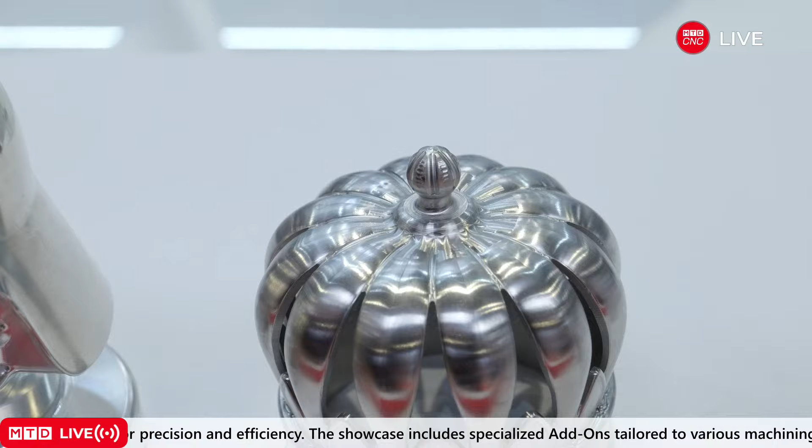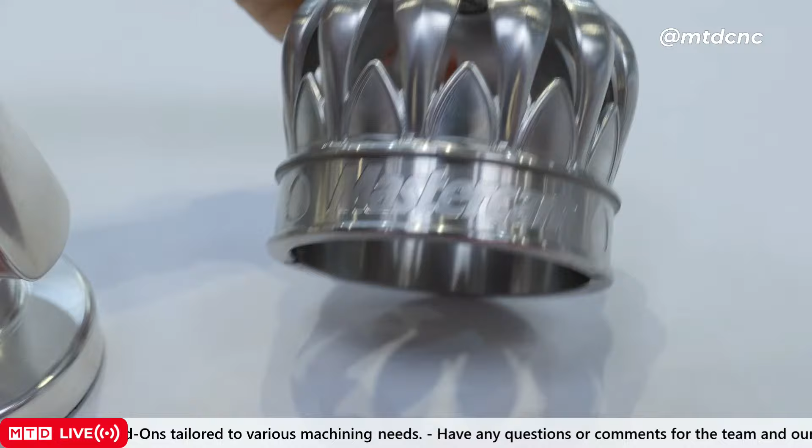Absolutely, it's wonderful that you've got the local UK manufacturing support here now, but you've got that global support as well that help you produce beautiful demos like this in partnership with Sandvik Coromant. Absolutely. So yeah, I mean, there's just a couple of really fun showpieces that we've had on display this week. If you take a closer look, you can see the beautiful 5-axis toolpaths on here that just prove Mastercam's ability in not just standard subcontract 2.5D drilling, milling, standard operations, but really high specification 5-axis operations as well. Yeah, absolutely, and obviously when you combine that with the power and the technology and the technical expertise from our partners such as Sandvik Coromant and also CG Tech, shout out to those guys as well.

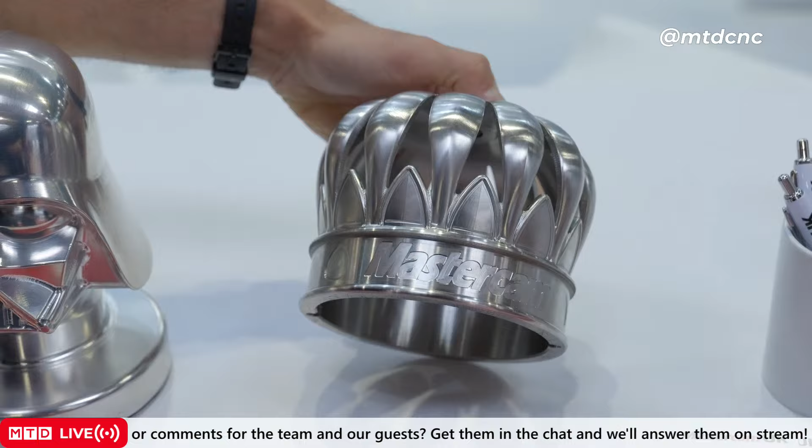Yeah, we're really in a great position to offer the best possible support and services that we can to our customer base. Absolutely, and we're going to talk a little bit about Mill-Turn later, but Mastercam is a fully fledged cam system that can work with anything a precision engineering house needs, right? Absolutely, yeah, it's an end-to-end solution running through lathe, Mill-2D, Mill-3D, multi-axis. We've also got a fantastic selection of product add-ons. So if you're working with turbines, blisks, and our Blade Expert product, but also we do probing. Yeah, we've got the complete solution.

And it's really cool because it means that we can hopefully answer any questions that customers have and really do our best to support them with a tailored package that meets their requirements.

So if you're a precision subcontractor, a precision engineering house, you've got lots of different components coming through the door every single day, you need a CAM system you can rely on that can program all of those components quickly and efficiently.

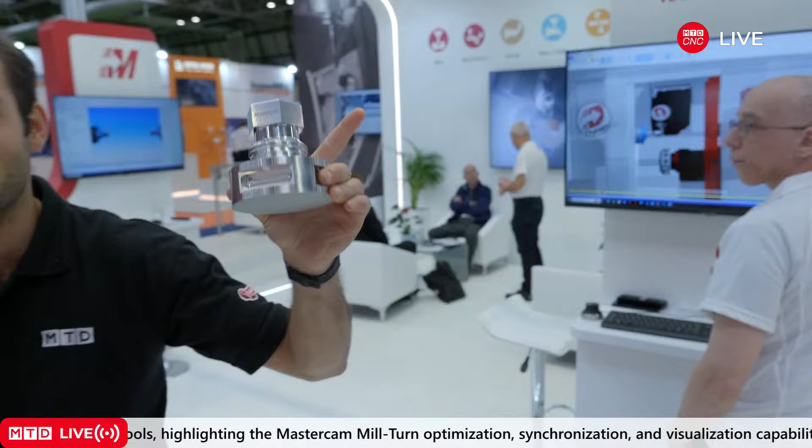Before that, we have Mastercam, brand new features coming in 2025.

Hello, how are you doing, Richard? I'm doing well, thank you very much. Good to see you. If you bring the microphone up a little bit closer, we can hear you. Yes, brilliant. So we talked to Richard yesterday, doing some videos about demonstrations of Mastercam. I was so impressed with the live demos, none of them went wrong at all. We'll see what happens today. So far, thank you, so far, okay. I love the confidence, Richard.

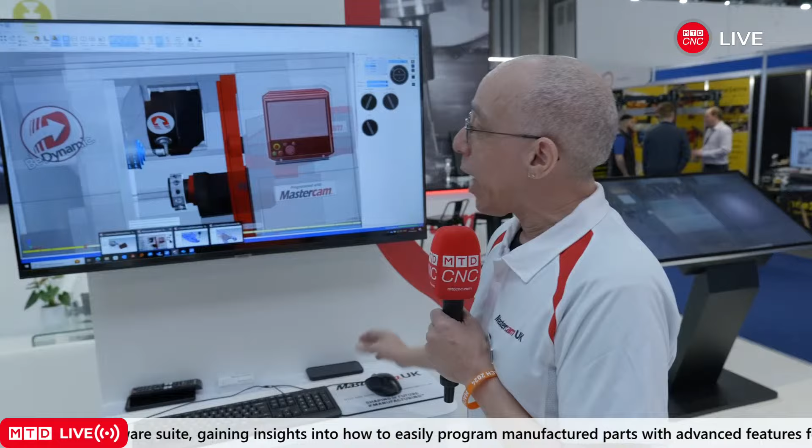Thank you. Brilliant. So you're going to be showing us some brand new features today. What are you going to be showing us? We've got just a couple of highlights for 2025. If you have a customer who's got the Mill-Turn package, we're supporting Y-axis turning now.

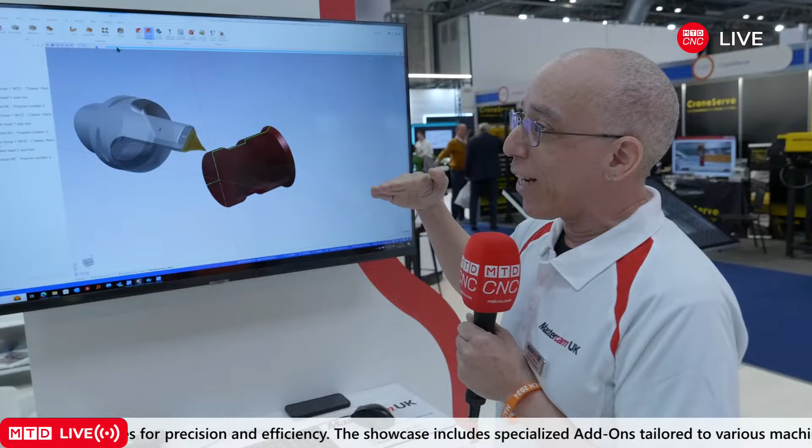If you have a B-axis head on your Mill-Turn machine, Y-axis turning means you're not moving the X-axis, the standard diameter. It can still move in X, it can still move up and down in X while traversing the profile, but the B-axis head spins over at a 90-degree angle. We're loading a turning tool, so rather than doing the traditional approach, coming down from above, we can tackle the job from the side. Better forces acting on the part rather than machining from above.

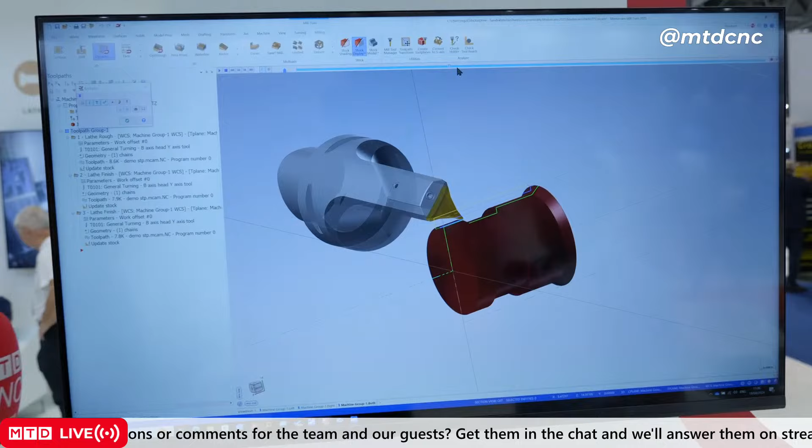Okay, so the benefits are in the cutting process itself. Cutting process, yeah, and better handling of forces on the machine as well. So we've got the simulation there, and this is a Mastercam simple simulation, but Mill-Turn comes with full machine simulation. So to verify that, we can get the machine up and running. Wow, you've got the full machine simulated here with the B-axis.

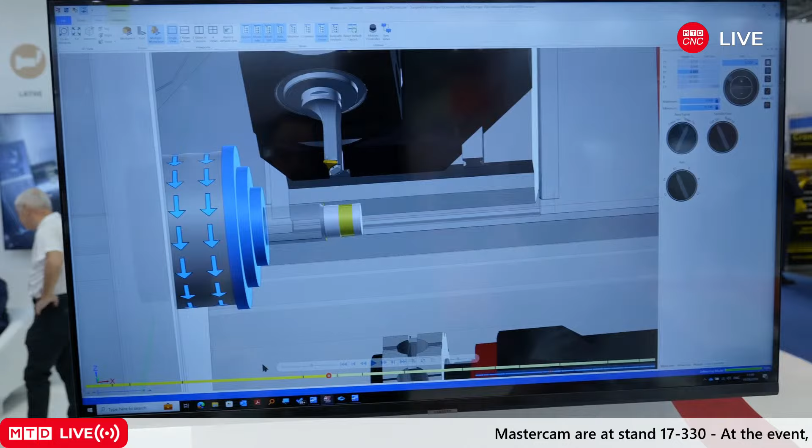Yeah, and I guess this helps more with collision avoidance as well, collision detection. Collision detection, axis overruns, rotary axis overruns, all get reported in the simulation.

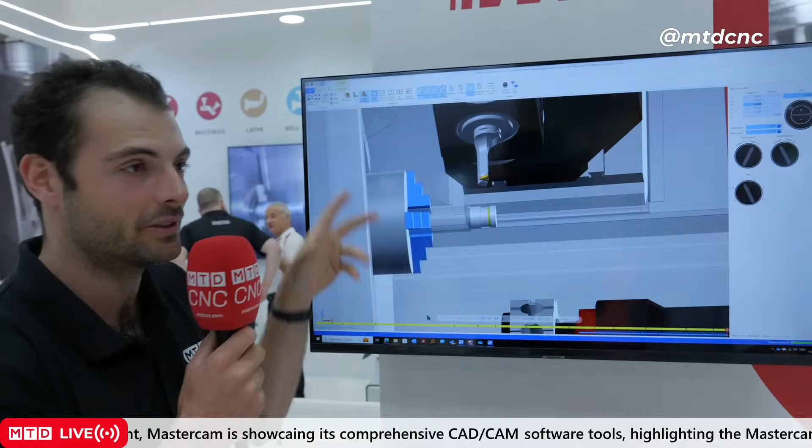It's fascinating, it's amazing you can use one tool to do left-handed grooving, right-handed grooving, all this kind of complex feature that looks simple, but you'd normally have to use two different tools, maybe a grooving tool and a turning tool. With this single tool, you can do every single feature. Absolutely right, yeah, so it's getting more flexible basically with the tools that you've got.

Brilliant, saving more tools, meaning you could maybe put more driven tooling in your turret, which would be quite useful. And Mastercam is actually quite good at Mill-Turn as well. Yes, yeah, it is. So with Mill-Turn we're trying to make the software more useful and drive better value out of your investment. And we're going to be seeing a live demo on quite a high-spec Mill-Turn machine a little bit later. Yep, you've got some more features to show.

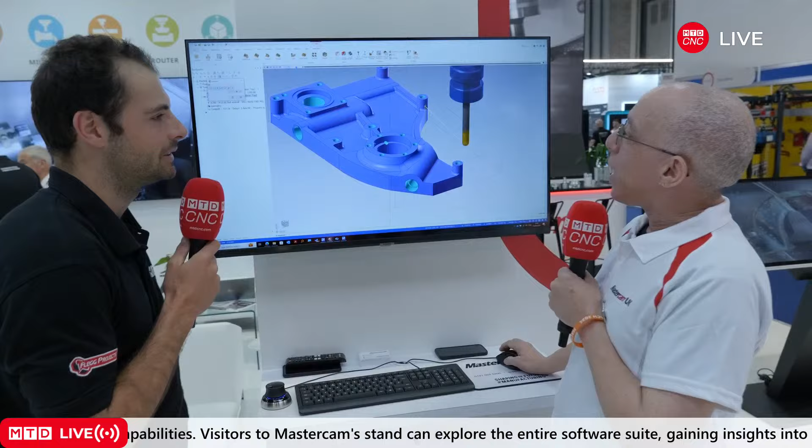Yeah, there's a couple other things coming. It's been a highly requested feature for Mastercam 3-axis users. We've had a 5-axis strategy in the multi-axis group called deburr, so they've been asking for this in 3-axis milling. So now for 2025 we'll have 3-axis deburring, no multi-axis add-on license required.

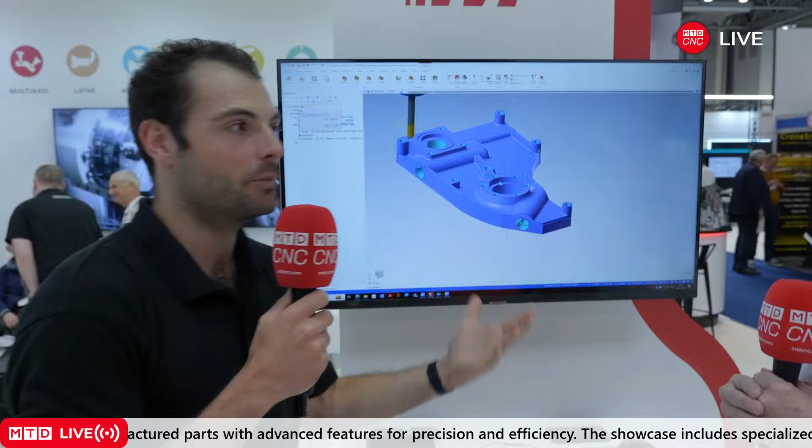That's interesting because I guess mostly deburring is like a big complex 5-axis cycle, quite a large cycle time to do that. Why would you want a 3-axis deburring cycle? Well, if you've only got a 3-axis machine essentially, you can't do 5-axis. Yeah, exactly, not possible. So even if you had a 3-axis machine, if you wanted to use Mastercam's deburring facility, you had to purchase a 5-axis add-on. Oh okay, because that's only where it lived.

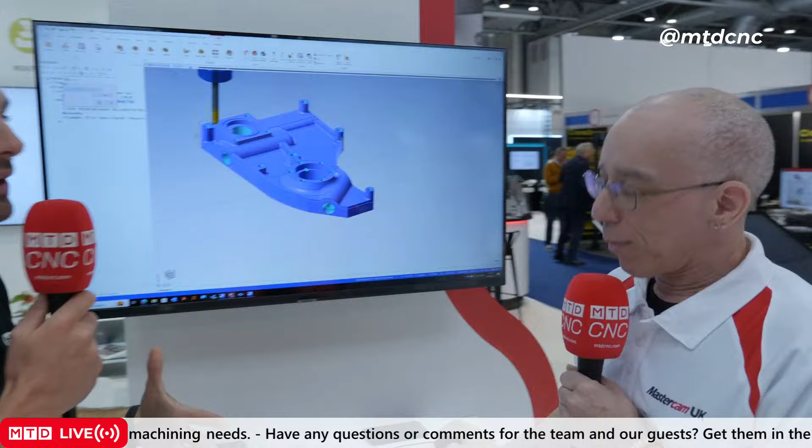Brilliant, but so this is now brought back to people who just have 3-axis. So yes, if you didn't know that, if you've got Mastercam and you don't have 5-axis, you can now do deburring come July with 2025.

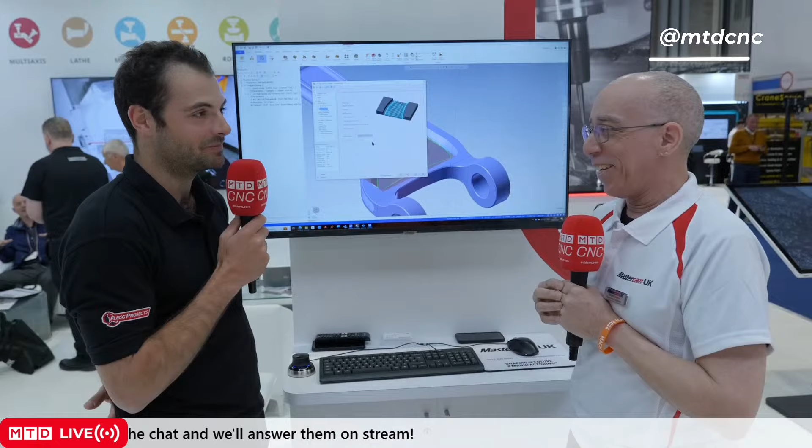25 years, man and boy. Yeah, absolutely. And so let's keep going. How many more features have we got?

Just one more thing I want to show. It's another often requested feature. We have trochoidal milling in Mastercam, we've had it for many years, but one request that's been coming in is semi-finished passes or finished passes as part of the dynamic roughing cycle. So this little entry, the finishing passes, is new.

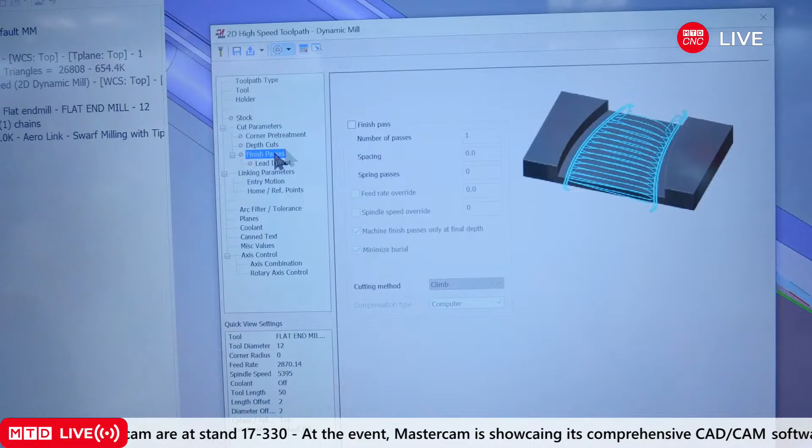You've got finish options, multiple passes with spacing, spring passes as well, cutter comp if you need it, wear compensation, G41 or G42 on G codes, or whatever your control requires. And lead in, lead out passes are available there.

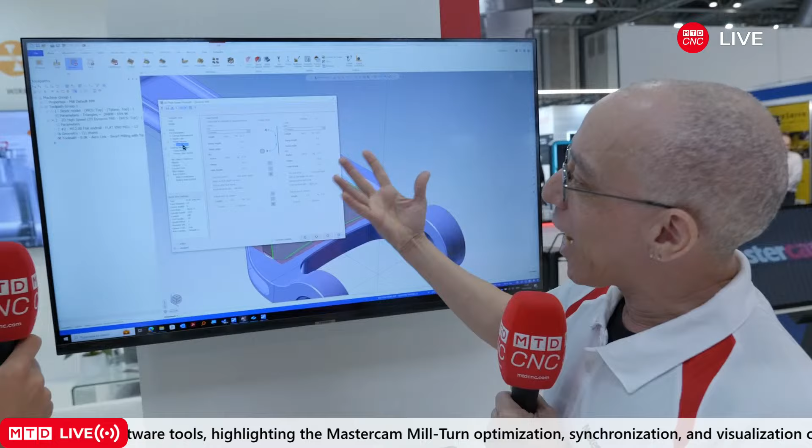If you're used to Mastercam, this window will be very familiar. That's really quite useful because the trochoidal cycles normally leave these kind of little lips from the lead in, lead out, which can make finishing with a smaller tool a little bit tricky.

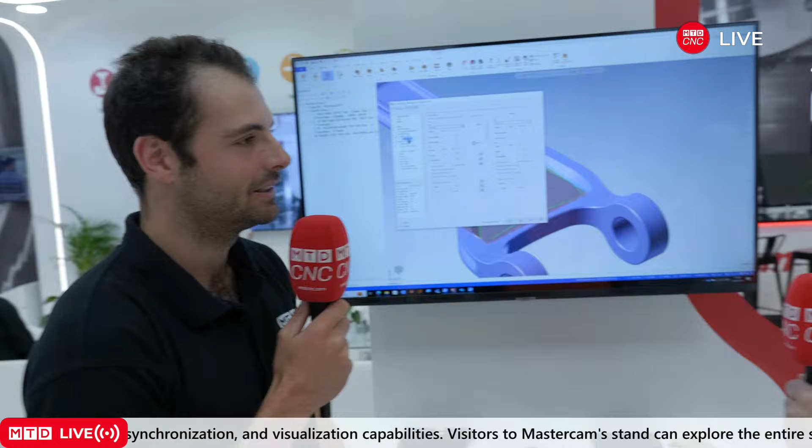Previously you'd have to add an extra operation, do a semi-finish as an extra operation. It's about collapsing all that down to a single operation, saving programming time, because you're still using the same tool but want to do a different operation. It takes more time to program otherwise. So it gets that material out, makes your life easier for the finishing tool.

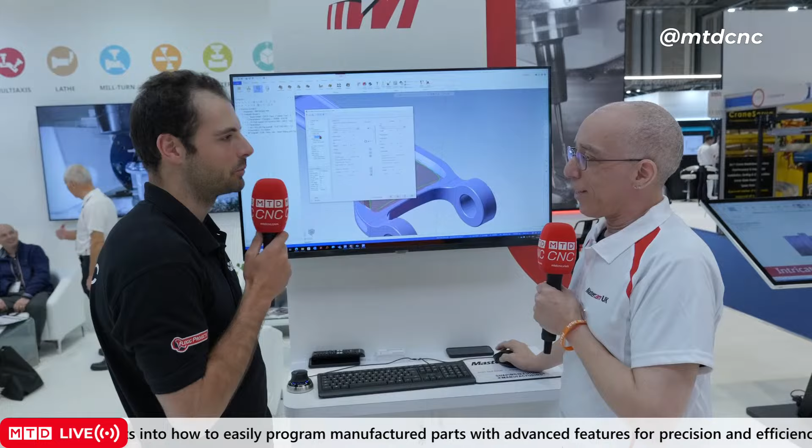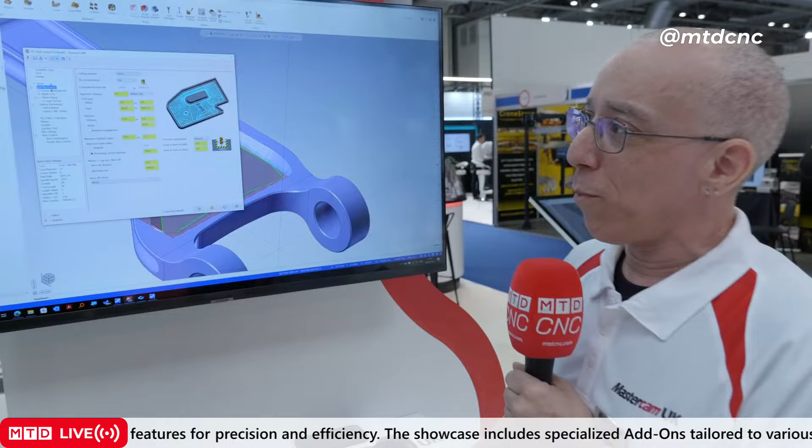It means people might reach for the trochoidal a little bit sooner because they're not going to have those awkward lips after a trochoidal operation. Hopefully this gets more people into dynamic milling. It's been around for a long time, but we're finding a lot of people aren't really embracing it. So hopefully this will get their full flute machining going, save time and make more money.

And there's also accelerated finishing, which is a feature that's been in Mastercam for a while, but that's something you want to shout about, right?

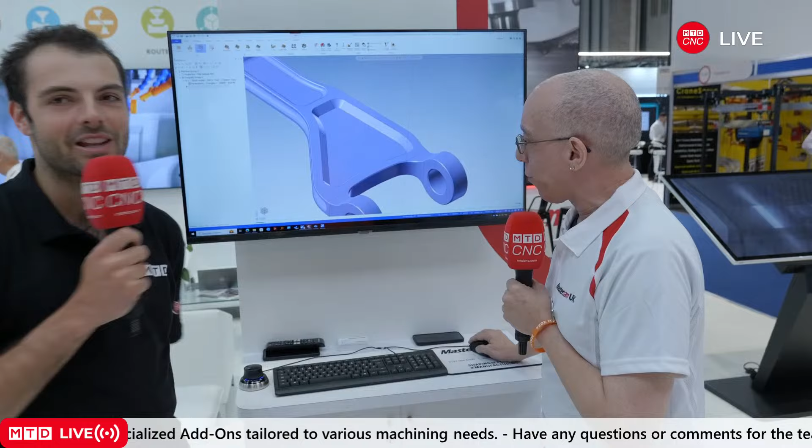Yeah, absolutely. So let me find a suitable file, Rich now, because I didn't know what was coming up. Let's see how many Mastercam programs you can run at once here. I could, I might be able to bring in an operation there. You're seeing some live thinking on your feet now. No panicking, I can see the cogs whirring. Yeah, if I go and create a brand new tool from the library.

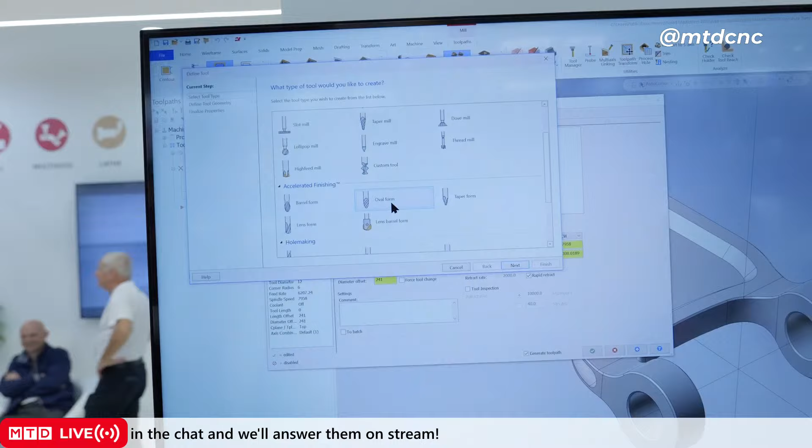So accelerated finishing - here's the forms that we could potentially support: lens forms, barrel, oval, complex, and taper tool forms, which is something quite difficult for smaller contractors to take on, because it's normally quite hard to program.

Well, we can use that with 3-axis machining as well as 5-axis machining, so also 3+2 positioning. Get the table at an angle, engage the barrel form with a larger radius, bigger step overs, more engagement, get the job out the door quicker.

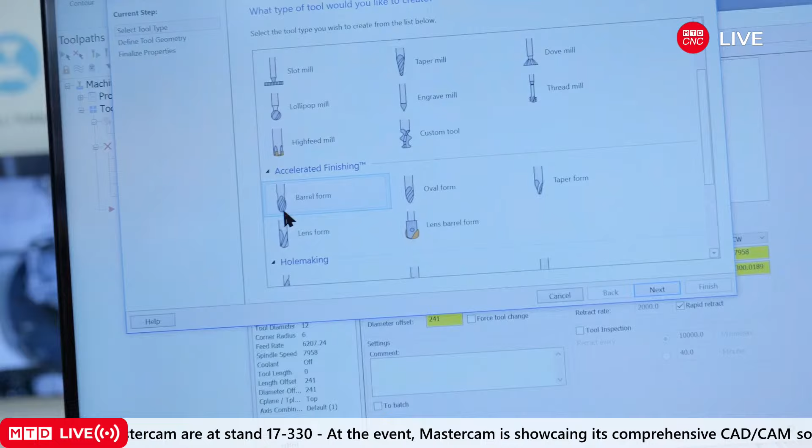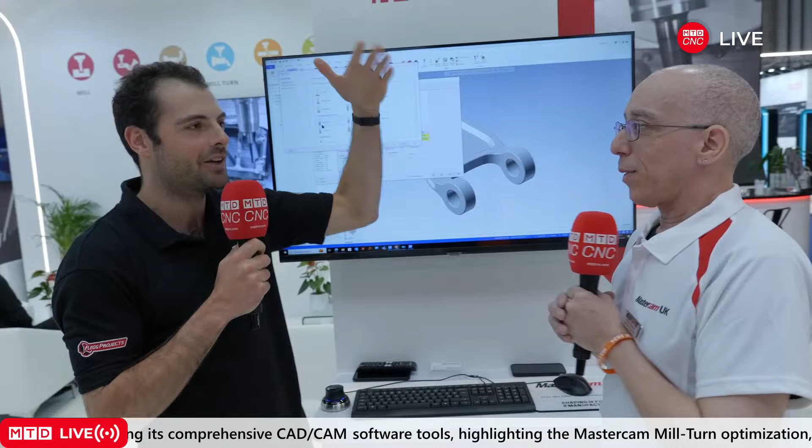That means components with more difficult port milling requirements or complex walls that need finishing, components that normally would be done by really high-spec precision engineering houses, could get tackled by engineering companies that would traditionally be doing simpler components. One thing that might have put them off more complex components is they might have been using ball nose tools, lots of small cuts, lots of small steps, taking too long and not making enough money.

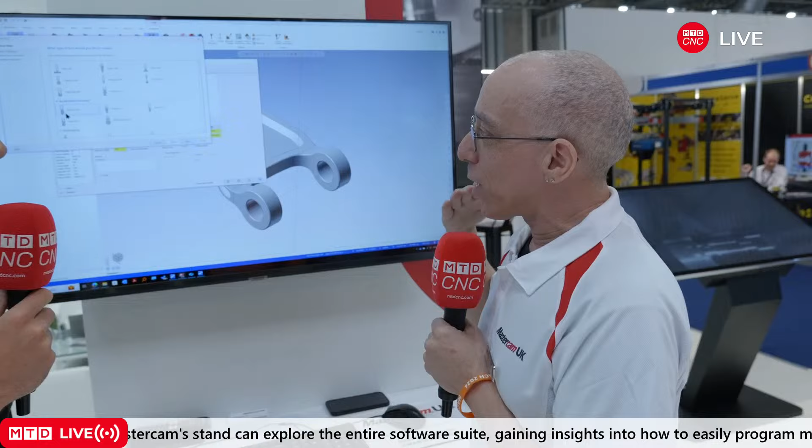So if we can get great engagement, larger step downs with the accelerated finishing tools, then they'll get the job out the door. Brilliant, thanks so much Richard for the overview of Mastercam 2025 coming soon.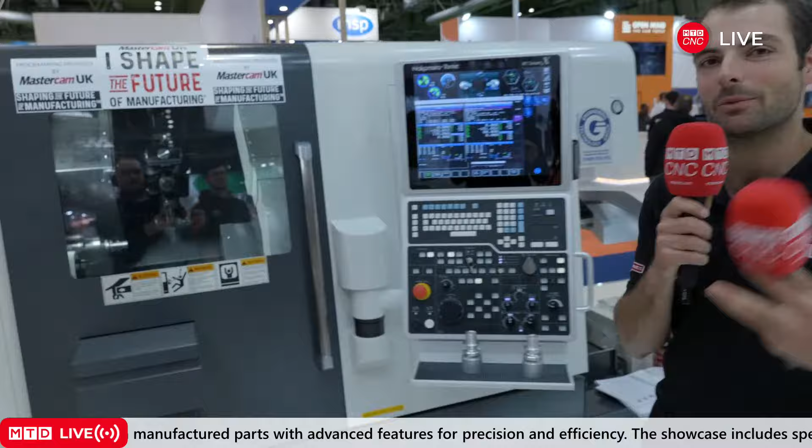Now, I'm here with Stephen Noak. Hello, Stephen. Morning, guys. Good morning. Afternoon, morning? No, it's morning. Okay, just checking. Still morning, yeah. And you've got a demo to show us, haven't you?

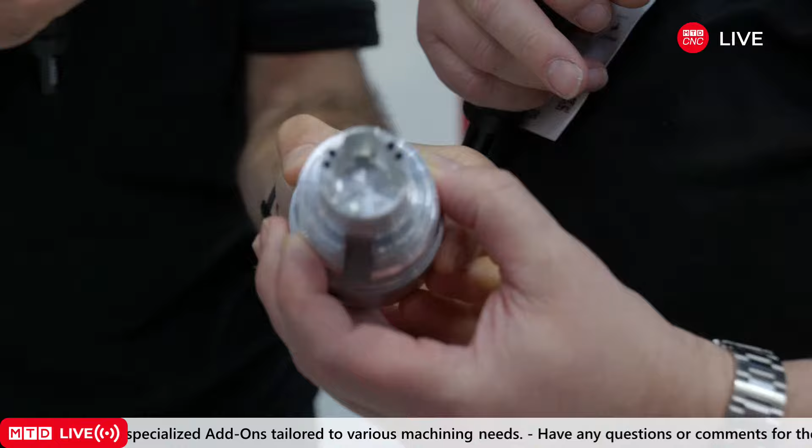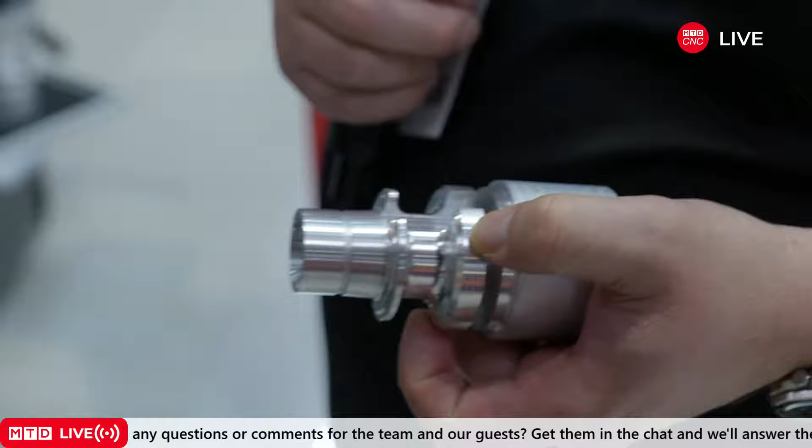Yes, we're pleased to bring the Nakamura WT150 with us. That's showing some of the dynamic milling toolpaths that we're doing. We're doing high-speed dynamic roughing of this bore, using dynamic motion roughing for the groove. We're using prime turning cycles from Sandvik Coromant, and doing pinch turning with the 2 spindles and 2 turrets together.

So yeah, we're really pleased to be here. There's loads happening. You've explained so much in such a short amount of time.

First of all, prime turning - this highlights the collaboration between Mastercam and Sandvik Coromant. The prime turning toolpaths now available in Mastercam can hugely reduce production time. This is a Y-axis prime turning tool right here. With the prime turning toolpaths, we can achieve a 20% reduction in production times.

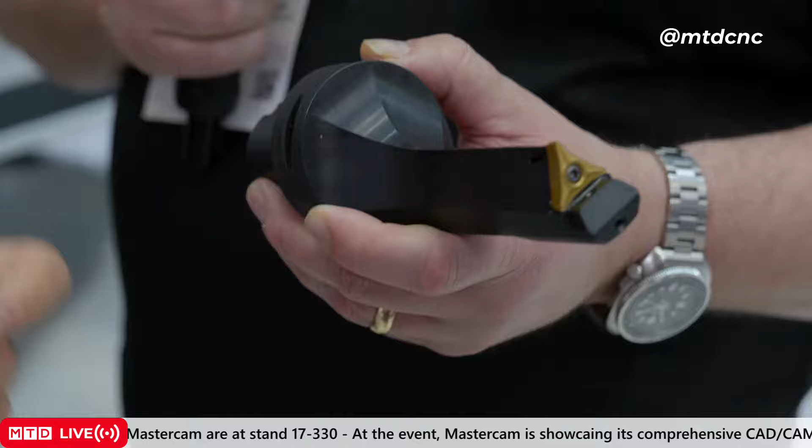We can use accelerated finishing away from workpieces. We have better swarf control. It's just a really, really good system for twin spindle, twin turret mill-turns.

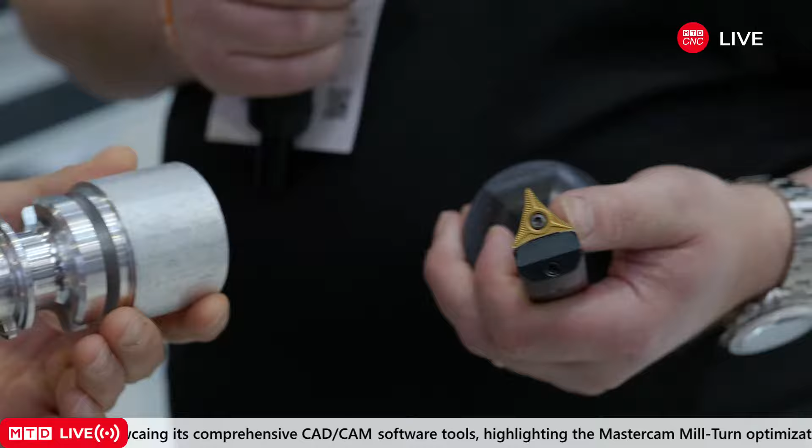And that's when you've got a high-spec machine here that can handle driven tooling and good milling operations. If you use one of these tools, you can maybe reduce your static tool count and increase the amount of milling tools you've got to do more complex components like this.

With the prime tools, the new prime forms, we can do lots of different geometries. We can do undercuts, we can reverse turn. We can do much more with the new style of insert, allowing us to put in much more milling content in our parts.

So we can have driven tools on every station in the WT. We have the Y-axis on the upper turret. So really, we are virtually a milling machine with turning. It's a huge step forward for people.

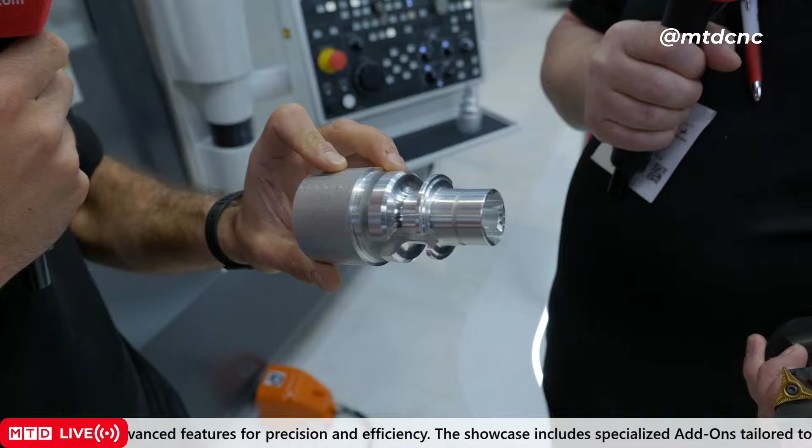When you've got all those features packed into quite a small space that you can then bar feed, meaning you can automate. This is quite a round component, but we've seen more traditional lathes with extra milling starting to make more square components - ones that are less suited to lathes.

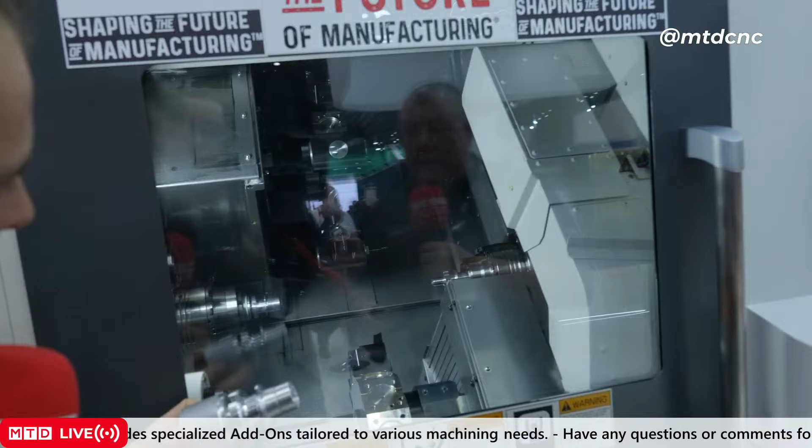Guys now are producing purely prismatic parts on mill turns. So long gone are the days where we only produce round components with a few slots, a few holes. Now we're producing square parts, rectangular parts. We use complex work holding to be able to pick it up, finish the rear end. There's no limit now really to what we could do on a mill turn.

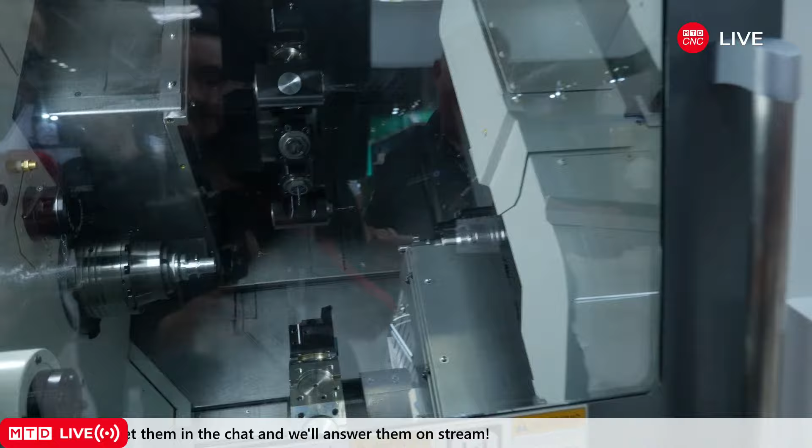Can you show us now? Could you get the machine running? Is that possible? Yeah, perfect. This is where it all goes right. Yeah fantastic, we want to see these machines turning and moving. And that's the wonderful thing about coming to MACH - you can see the machines running themselves and cutting these exact components.

This is a great example we're seeing here of the prime turning in Mastercam. So we turn away from the spindle, which is new. So we drag all of the swarf that would normally nest around the component away.

You're turning the workpiece the wrong way there, Steve. No, it's definitely the right way. No, you're turning the right way.

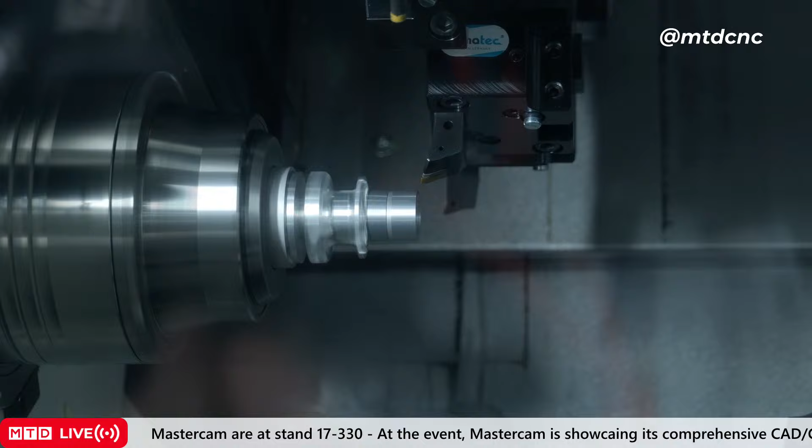Fascinating - I guess you have quite a large lead angle on that tool, meaning you can use a lot of that carbide tip. Exactly, we roll with a low step down. That style of insert enables us to roll into cut, so we can take up to 4mm deep, and we can accelerate to maybe 0.7mm per rev with our feed rates.

And the good thing is, we'll bring all the swarf with us, which is exactly what we need to do with a sub-spindle machine. We do not want the sub-spindle to grip the part with swarf wrapped around it, so the toolpaths really help us.

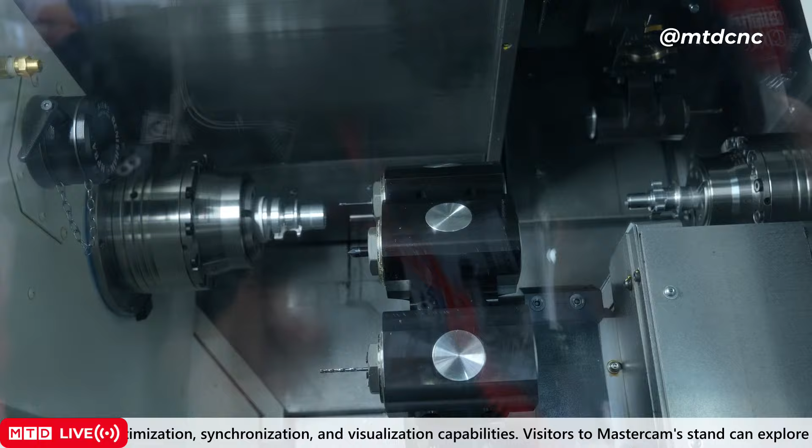And that also helps not only with making a single part, but if you're trying to automate this and making 1,000 off overnight, you need to make sure that automated process is stable - it's clean, swarf-free, runs repeatedly, and that's exactly what the new tools will do for us.

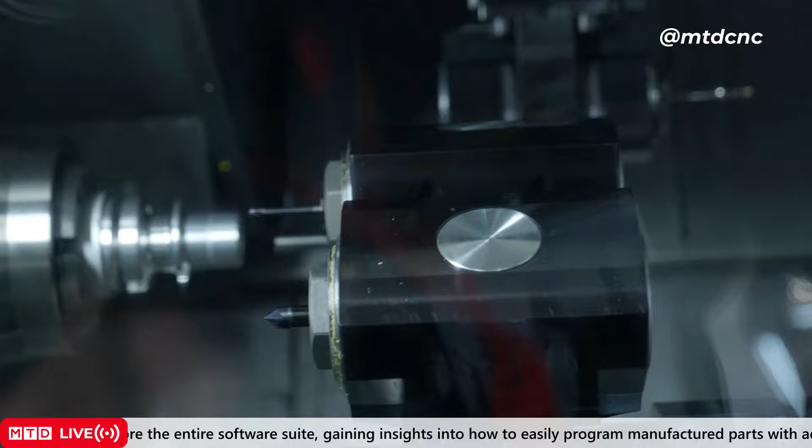And what I find fascinating is when customers buy a machine with high spec capabilities, lots of milling, lots of turning, you need to try and get the best out of that machine. I assume they come at a higher cost than a more standard machine, and so your CAD-CAM system is really important in trying to get the best out of that machine.

Exactly. With complex workpieces, you need a reliable CAM system that will just enable you to post and go straight to your machine - that's what we get with Mastercam. Mastercam Mill-Turn enables us to program really complex machines really simply, and the post processors are that good, and the Mill-Turn environment lets us see exactly how the machine is going to behave.

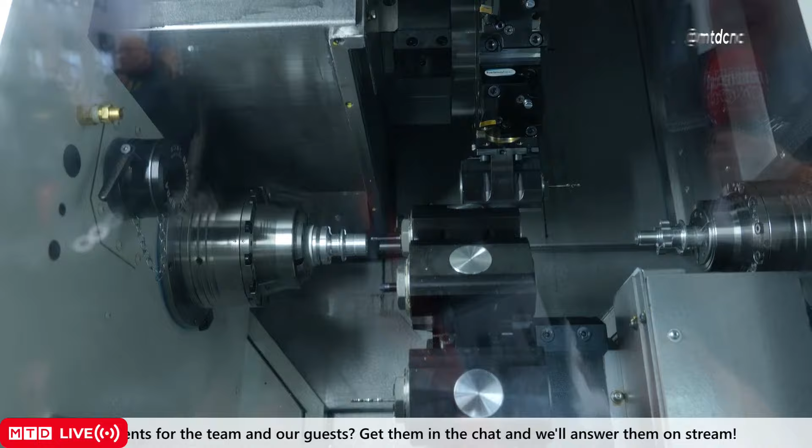We can post and go, and it just dramatically reduces programming time. Guys in the engineering offices are using it and thinking, this is really reducing our times.

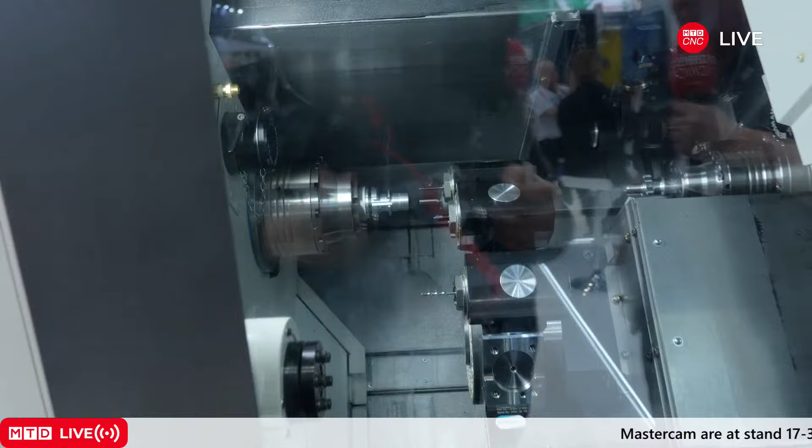Yeah, absolutely. I guess it helps also that ETG supply Mastercam in Ireland. We do. Mastercam is sold direct in the UK, but in Ireland, you guys will be selling the machine tools and Mastercam, so you can work really closely and make sure that these high-spec machine tools are used to the best of their abilities. That's it.

We believe in delivering a full turnkey package. So we deliver the machine tool, we deliver the tooling, and we deliver the program and the software for the customer to use. Yeah, absolutely.

So if you're interested in moving into doing more automated mill turning on high-spec machines just like this, then Mastercam is definitely going to be a good grounding for not only your standard components, but also more complex components like this as well. Exactly. Mastercam Mill-Turn, absolutely super.

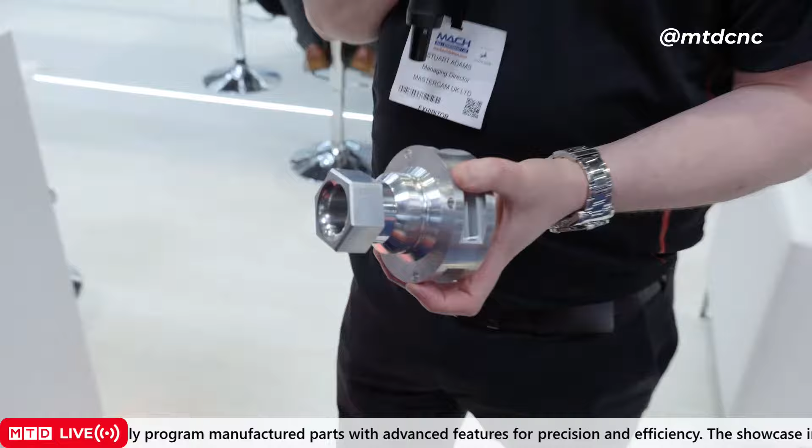Yeah, so one of our customers that we've been working with, a new customer actually, over the last 3 to 6 months, a real great opportunity for us on the Mill-Turn application, working with a really complex machine. And the team have been working really, really hard down at the customer's premises to achieve the desired and required specification and tolerance on their parts.

Can you tell us anything about the kind of components that they're making? Is it a bit sensitive? Yeah, a little bit so. They're a well-known supplier into Formula One.

Nice, that's cool. So yeah, we were really excited about the opportunity to work with their team, and my team particularly have really enjoyed the challenge of deploying our Mill-Turn. It's nice to see a little component that might be on, I guess, a Red Bull, Mercedes, or some kind of car. Can't talk to that, but yeah, we're really excited just about the technical challenge, because obviously my applications team, my applications specialists, that's what they thrive off.

I'm really passionate about us, as the Japanese saying goes, going to the gemba. We need to go and see where it's at, where the chips are flying, and make sure that we're present to support our customers. And yeah, that's what it's all about for us.

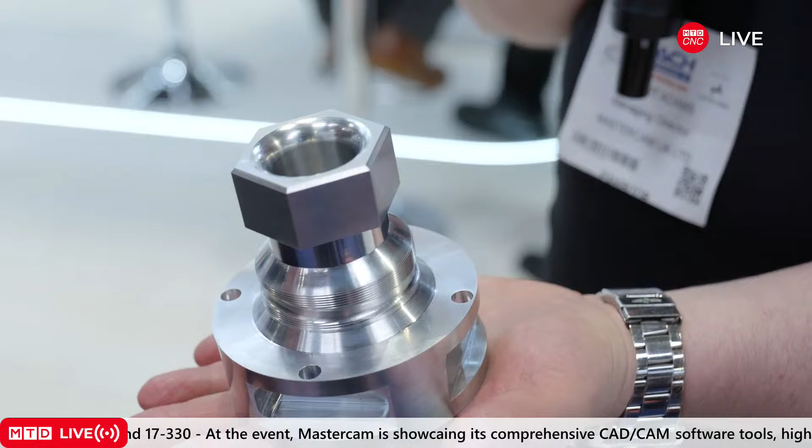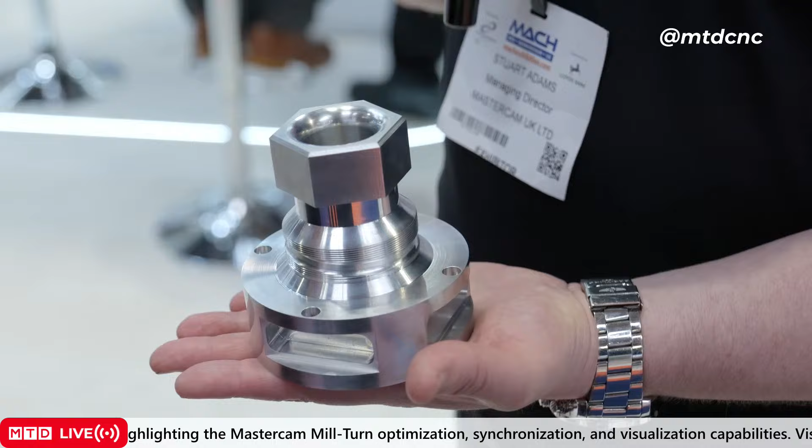Obviously it's our first MACH show, and to have that as a real sort of thank you from the customer, it meant a heck of a lot to us, basically, because we really pride ourselves on trying to go above and beyond in terms of our customer service and our technical support, and it was a great testament to know that we're headed in the right direction.